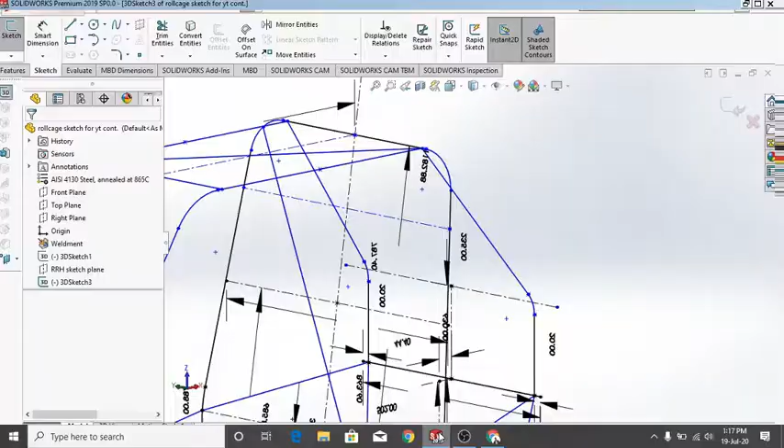So, as we are done up to here, we are only left with the construction of a gusset and making a hitch point. It is up to you where you make a hitch point. You can use this member for making a hitch point or the lower member. We'll be going for a hitch point later, after the completion of the gusset.

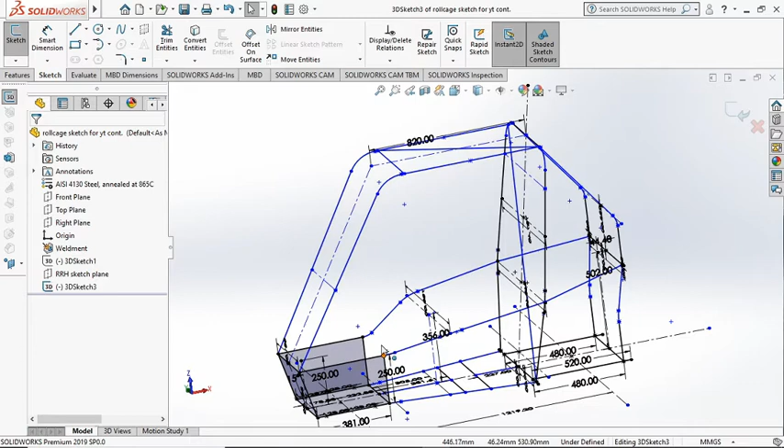So, for the gusset, we have a main rule that we have to follow. Here we should have a primary gusset and another gusset here. So we may go for a long gusset here. You might have already seen it in the rule book. So okay, this will be forming a gusset here.

As we are going for a noseless chassis, that also requires a gusset. So this may be considered as a gusset. As we are going for a noseless chassis, we need to be more cautious about making the gusset. The unsupported length should not be more than 41 inches. That should be a major consideration here.

So I'm just taking a point. I already took the point at a distance of 527.51 from the end of this bend. So I took a point on this one, and I'm joining this point to this point with a line. Okay, there is a small change of plane there, but that will be okay while you manufacture it. This will be making one of the gussets on either side.

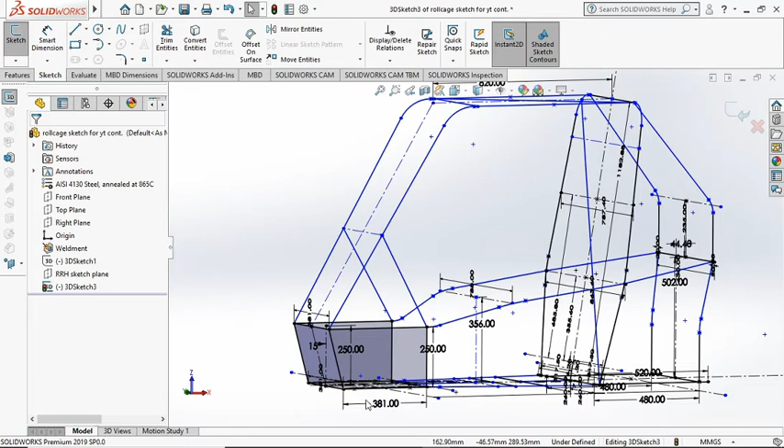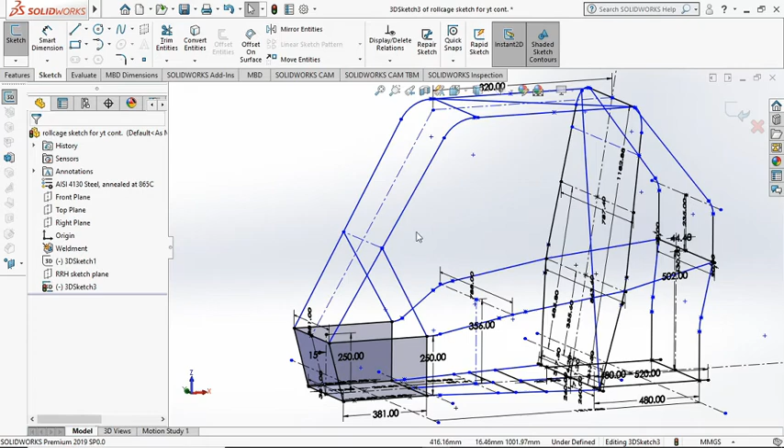So in my case, from the points provided by my suspension guy, I have been given two points here for the lower wishbone and the upper wishbone somewhere around here. There will be a line here that will be forming a tube later, and that will be the base for the upper wishbone, and somewhere between this there will be a member for the front upper shock mount.

Okay, now for the main and foremost gusset, I just took a point. This will be a midpoint. I have measured this from this point to this point, including the length of the arc, as 163.63. The radius of the arc is 158.64 mm, and the angle of this arc is 59.13 degrees. So I converted it by the formula and found the length of this arc.

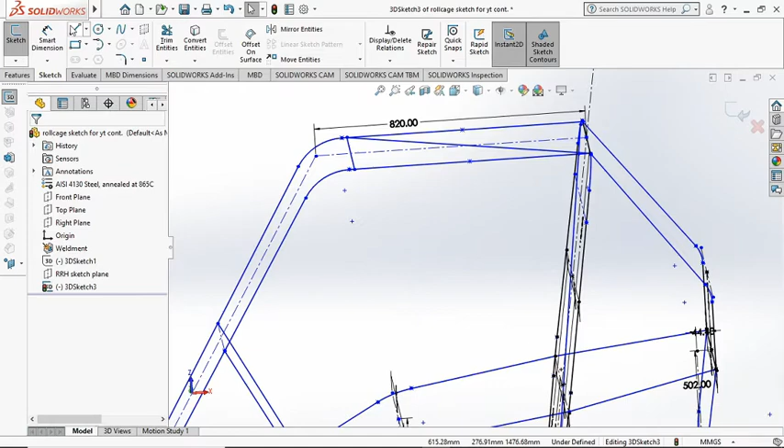So the addition of the lengths from this point to this point, plus the length of the arc, and from this point to this point, should not be more than 41 inches. Just mark that. Okay, this is exactly 41 inches as I measured, and I'm taking that. And from here I took a point at a distance of 95.82 from the end of the bend.

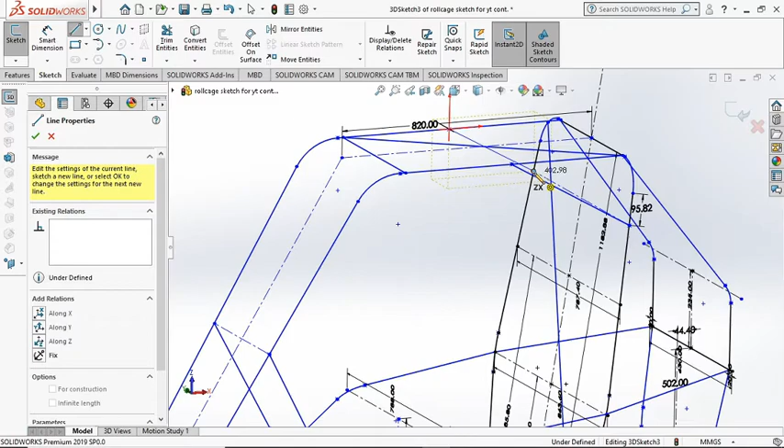So I'm drawing a line joining this midpoint to the point, and the other one from here to the other point. Don't get confused, this is a simple way of making gussets. And here, for the SIM member, we should have a gusset. A few people go for a zigzag gusset here, using two gussets, from here to here and from here to here. That is not necessary if you have properly analyzed the chassis.

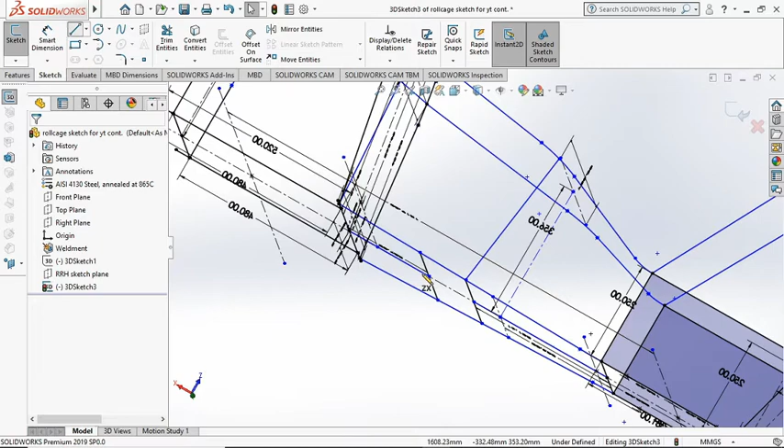So I am taking the gusset from the midpoint of this to one of the underseat members, this one. And I want to remind you once again that this is a worked-out chassis. The vehicle which we built with this chassis still runs in our college, so this has provided me a lot of results.

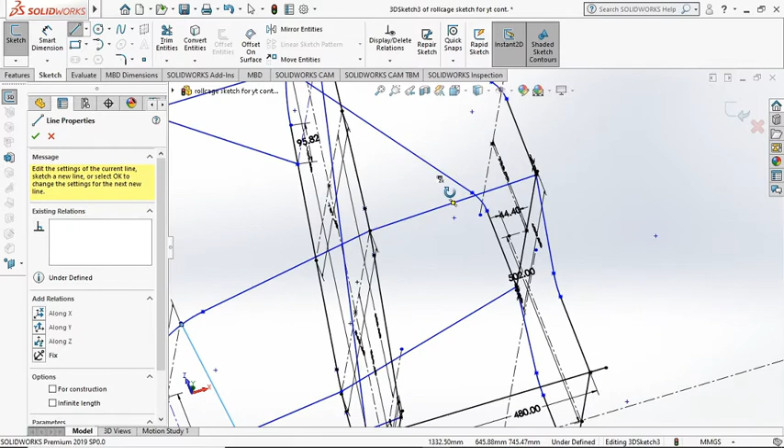And the foremost thing that I faced in the event is that I used a bend here, in the rear FAB. So let's go to the rule on rear FAB, the rear bracing: point B and one vertex at either point S or point A. The tubes forming this structural triangle must be continuous members, bent less than 30 degrees. This should actually create a structural triangle there.

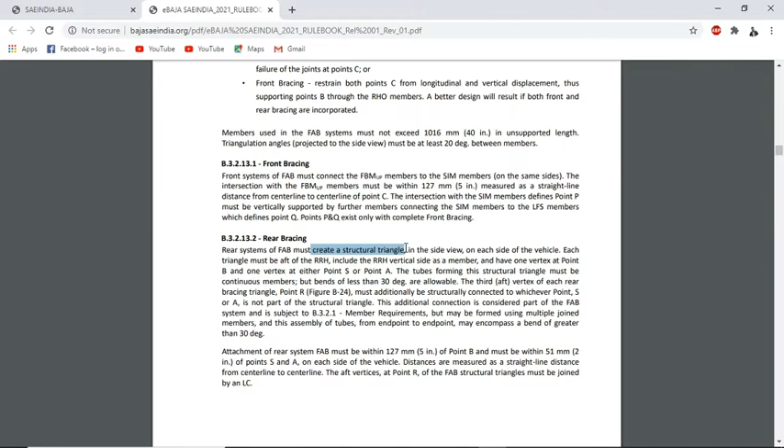Okay, that should be creating a structural triangle. Okay, here he meant to say that this point, this point, and this point, this is S, this is B, and this is R. This should actually create a structural triangle here.

So basically a triangle is stiffer than any other geometric structure, I mean a rectangle or rhombus or anything. A triangle is stronger because it divides the forces into two, so that will be coming under the answers part. Okay, so the mistake I have done is I have taken a bend. This is not a mistake actually, but we can go however we want.

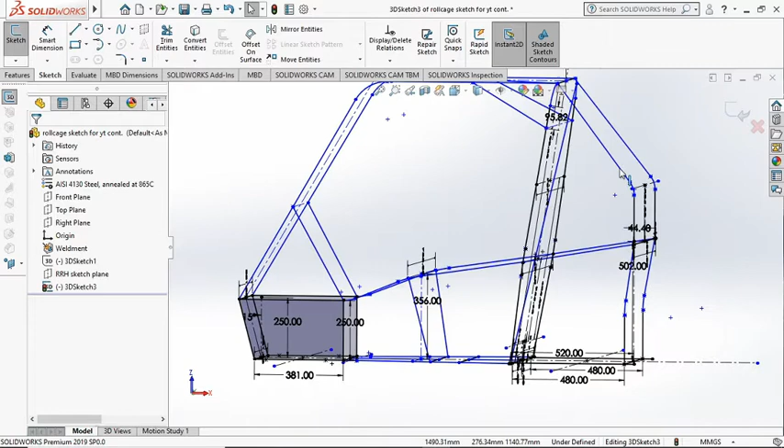I have to put the battery from the back side. I have already mentioned the dimensions of the battery in the previous video. Now I need to make a gusset here. In the event I was compelled to make a gusset, so we manually welded it there. So I'm just adding a gusset here to the center point. As I have taken a bend there, that's why I need a gusset.

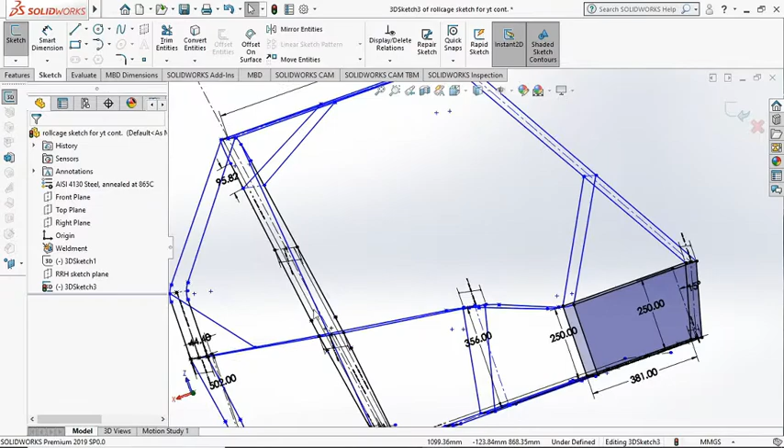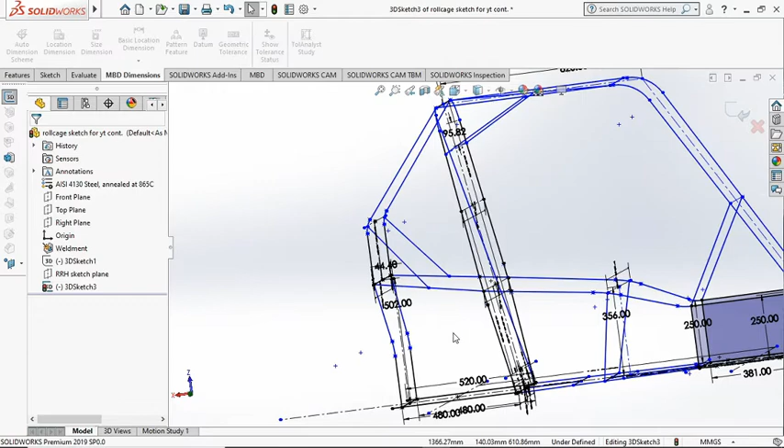If you haven't used a bend there, if you have accommodated the battery without the bend, you can also reduce the ground clearance by reducing the height of the battery. If you are going for a readymade gearbox, you have little choice of adjusting the battery. But if you are going for a machined gearbox which you have properly made, you can also put your battery here on the floor. That will be very convenient, and your motor and gearbox here, and the half shaft along this axle, whatever wheelbase you are taking.

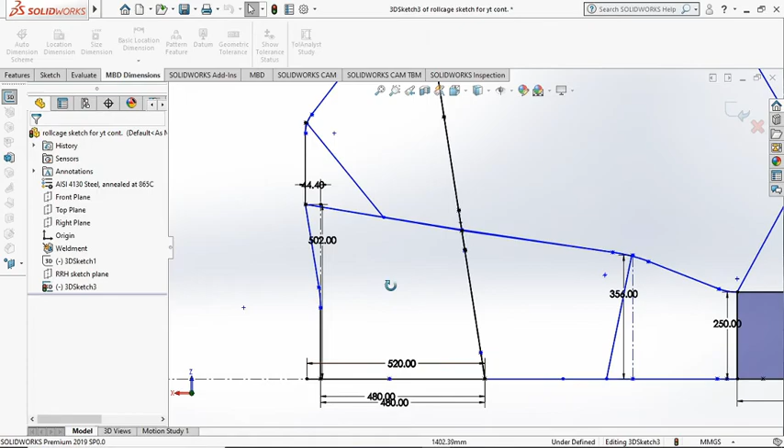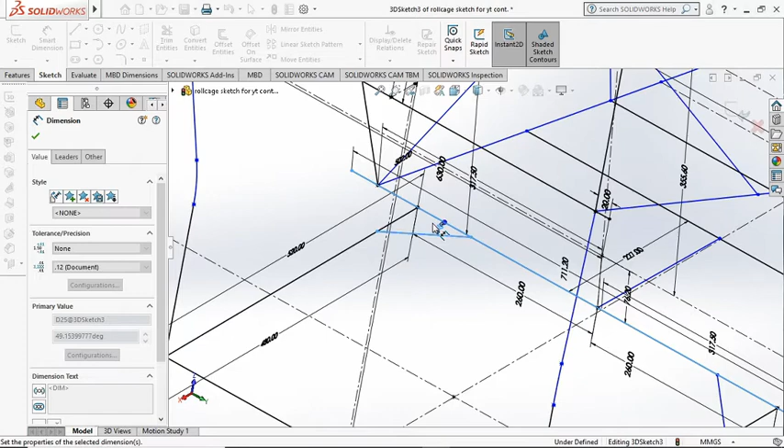So I'm done with this gusset, and I need one more gusset here somewhere. So just randomly taking the gussets. These gussets are put accordingly by analyzing them. I'm simply putting the gussets here, but that doesn't mean that I have just put it like that. For every angle of the gussets you need to analyze the forces. At what forces you are getting more strength, that will be something that is structurally strong. I hope you are getting that.

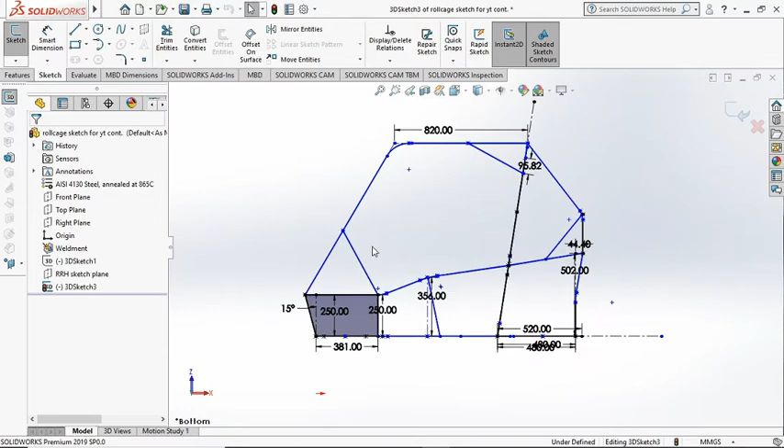So the point I mean to say is that every gusset needs to be analyzed before actually manufacturing it. We need to analyze the structural stability of the roll cage with the possibility of the gussets. I can put two gussets here, but I have only used one gusset. So I'm not just randomly taking whatever I want. I analyzed that, and at the end of the day, I got this as the strongest possible gusset for my roll cage. I hope you are clear with that.

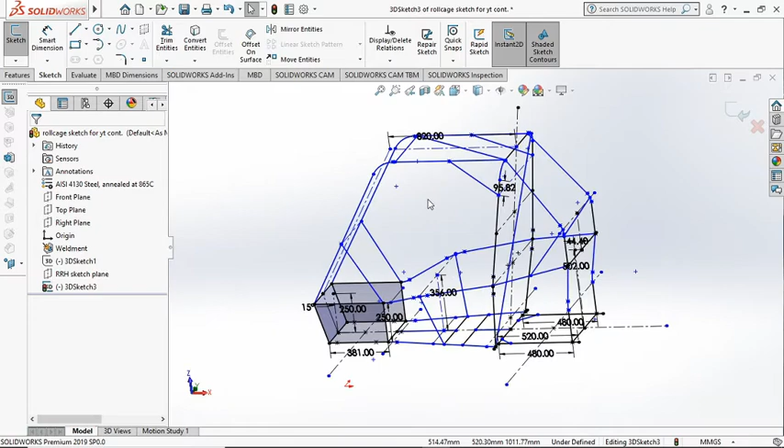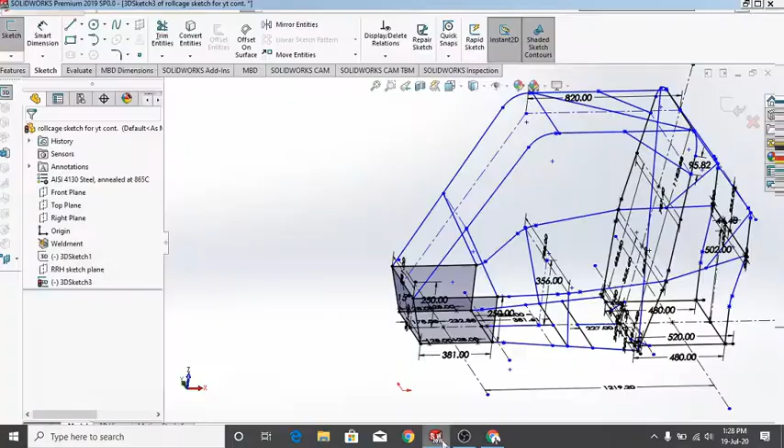So this is the completion of the roll cage of the E Baja chassis. There is one more thing left. I just want to make a hitch point. Coming to the rule about making the hitch point: the length of the hitch point should be 8 inches, and the width from the body should be 2 inches. This is more than enough. We'll be going for the 8 inches and 2 inches.

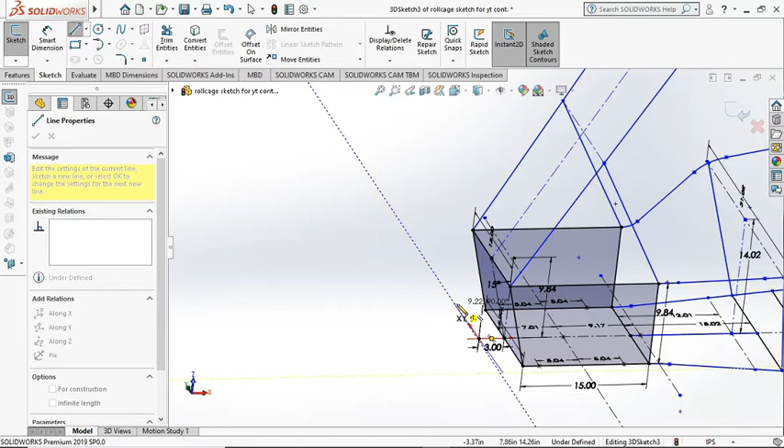Now I'm just converting this to inches. Considering the tube dimensions too, now I'm taking 3 inches here. After adding the tubes, I'll be getting 2 inches clearance. Just calculate according to the primary member dimensions. My primary member dimensions are 1.25 inch, 1.65 mm thickness.

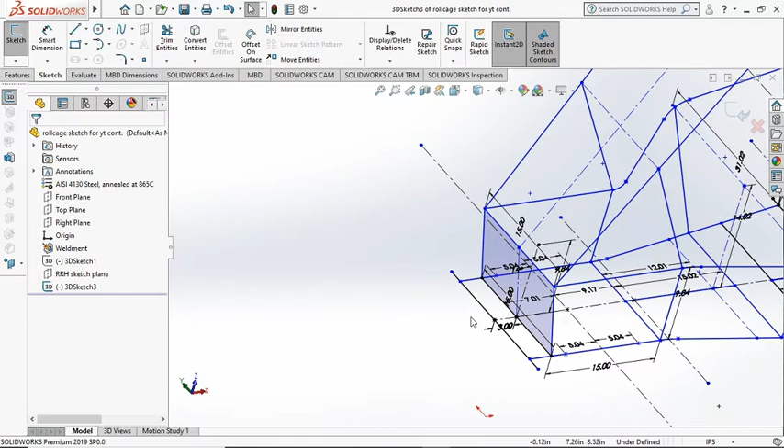Now I'm just randomly extending this. Okay, now this became my hitch point, with 3 inches, and of course I have used 15 inches here. The required length is only 8 inches. This is the complete sketch of my roll cage.

So in the next video I'll be adding the tubes, the weldment tubes for this roll cage according to primary and secondary members. I'll make clear what the dimensions of my primary and secondary members are. I'll be posting a video on the addition of weldments to this roll cage, how to make the weldment profiles for the roll cage.